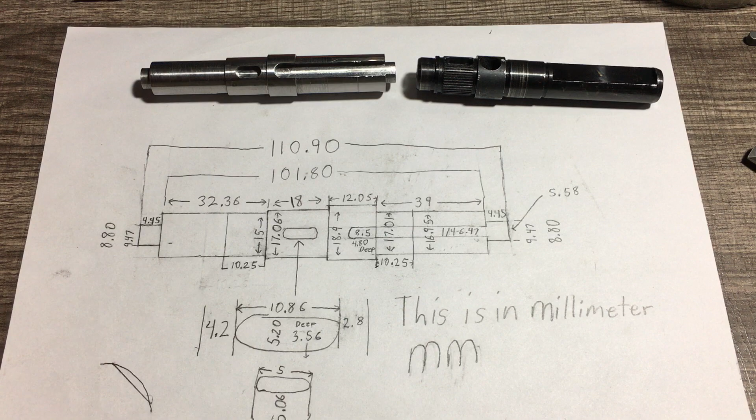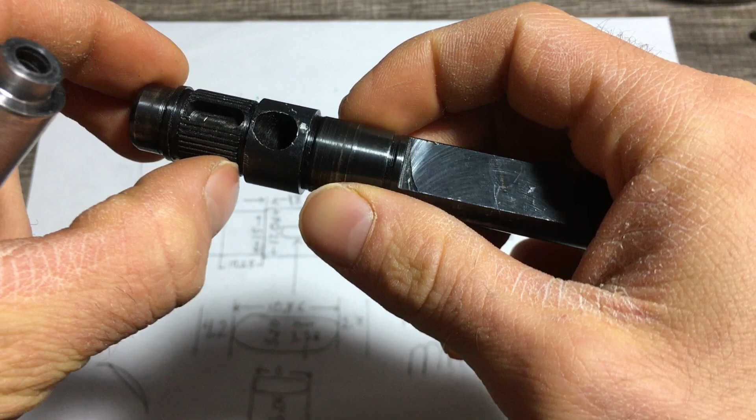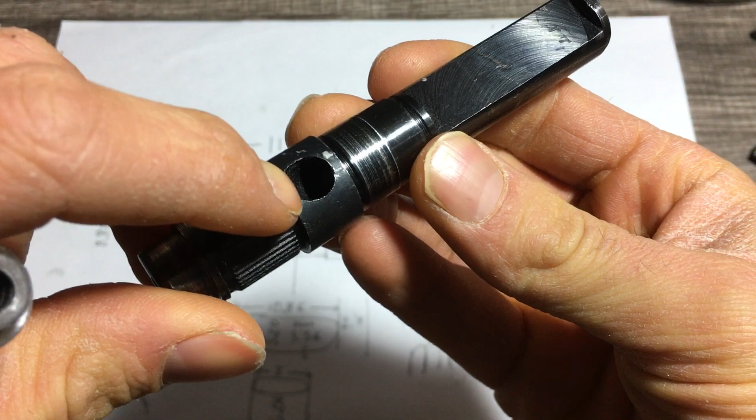So you can see the factory shaft has a few extra features in it that are probably not needed, so you don't probably have to worry about making it look like this exactly. So that's a good thing. You see there's a hole that goes through here, and that's mainly for the wires to make it through to the other side.

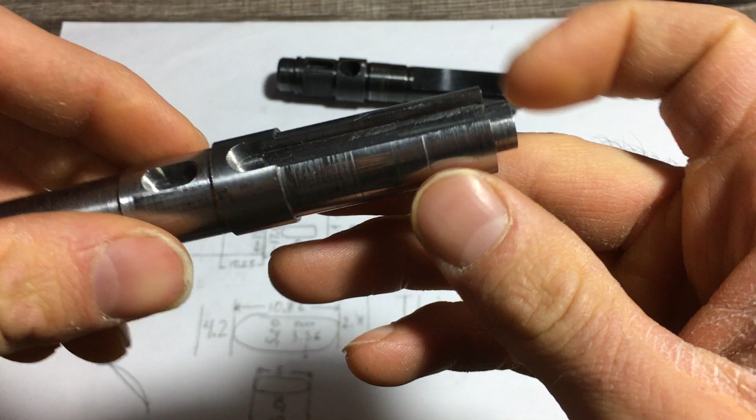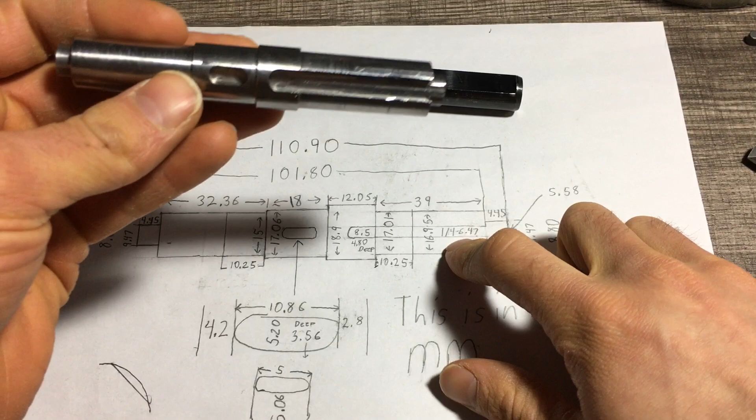On this one, instead of going through the center of the shaft, it goes underneath this keyway, and this keyway allows the wires to get underneath. You see, this was drilled out with a 1/4 end mill. It was milled out pretty much from here all the way on the inside here. You see 8.5 millimeters from here to here. Yeah, pretty much.

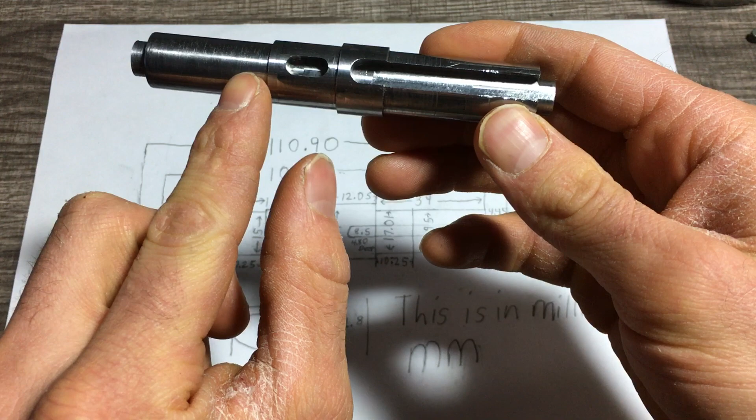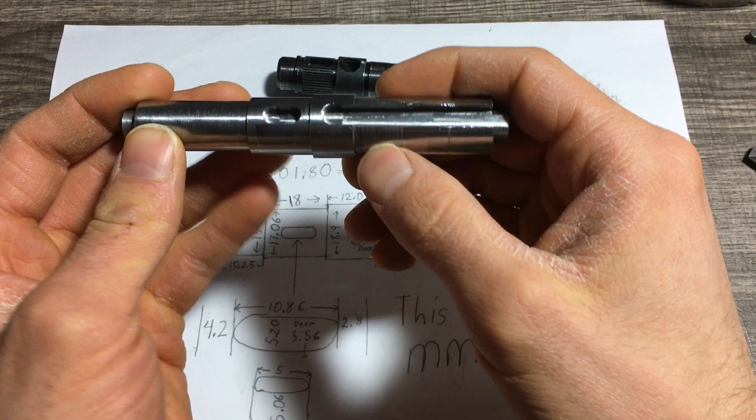The main surfaces you want to be worried about when making this are like the bearings and the stator, and the spacing between them are important. You see here the diameter you want to try to get close to is like 17.01 millimeters. This one's a little bit underneath that size, and I can show you what I mean by it.

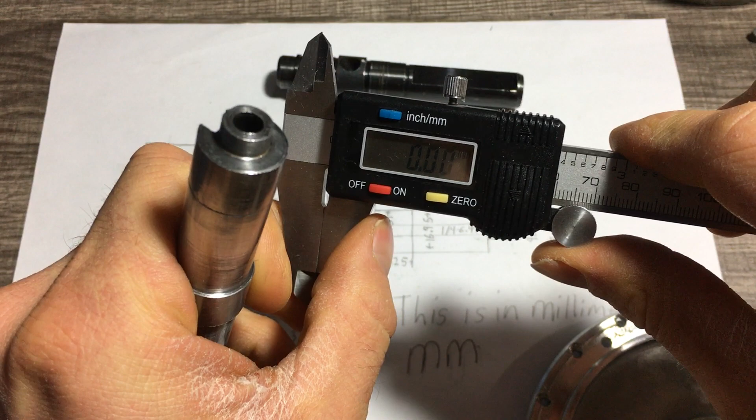I grab the caliper first. Oh, that's not quite correct. What's going on here? Okay. This is saying 17.1, but it really isn't consistently. Yep. Yeah, this shaft should be very close to 17 millimeters.

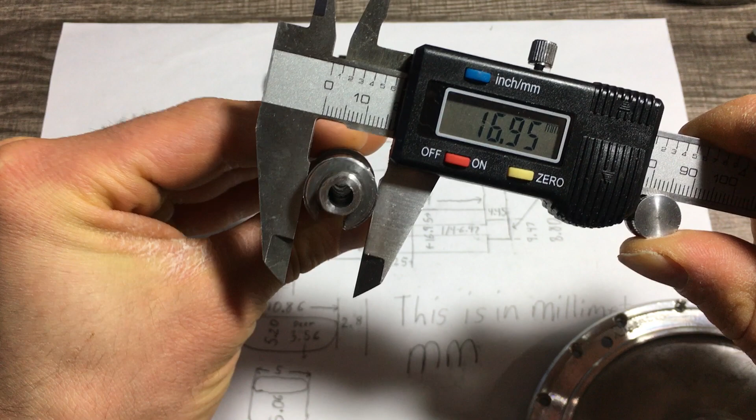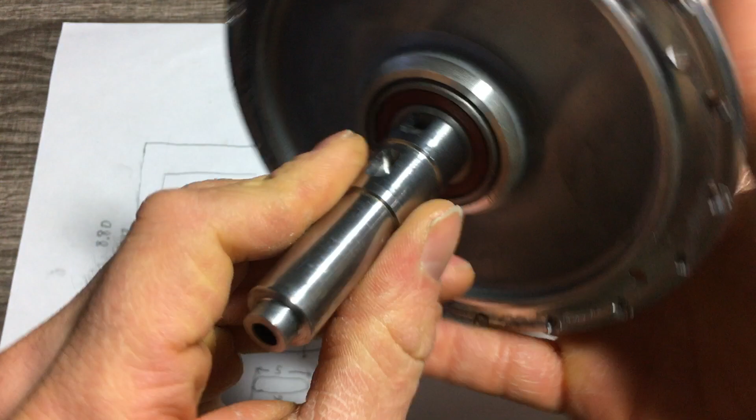And as I go through here, diameter kind of gets a bit smaller. And that helps to allow the bearing to slide onto the shaft. See here is a little bit of wiggle room between the bearing and shaft, and that's pretty much what you want to avoid. Unfortunately, on my spindle, I sanded a little too far. I got a little bit of wiggle room on the shaft. So you definitely want to be a bit larger than the 17 millimeter. Or just try to sand it until it just barely fits.

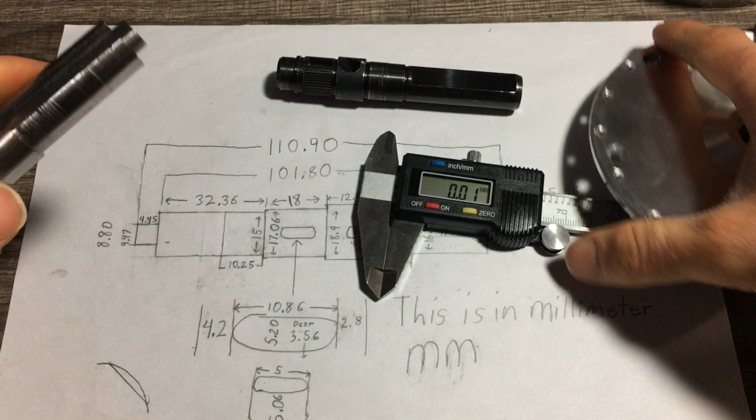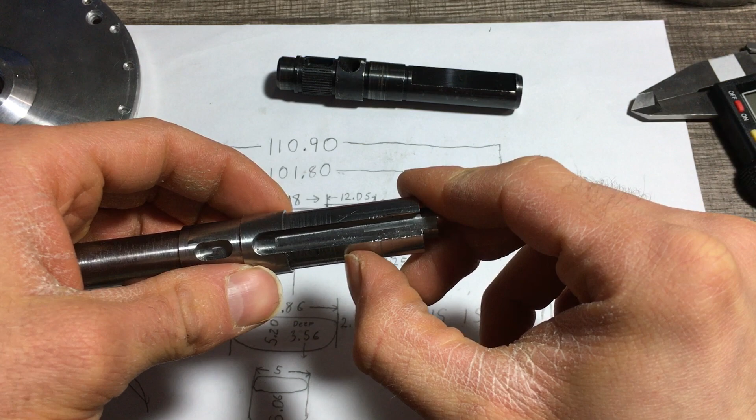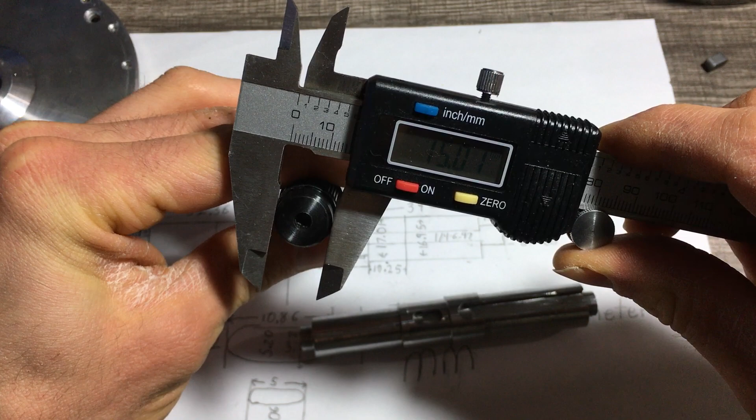See, this spacing here is where usually the bearing would sit on the shaft. And so after the spacing, you can make this shaft diameter a little bit smaller just after it, so that you can get the shaft on and off easy. This side, we have 15 millimeter, pretty much 15 millimeters spot on. And I can show you, it's pretty much spot on 15 millimeter. Zero. But yeah, it should be like 15 millimeter on this one. Pretty much 15 millimeter.

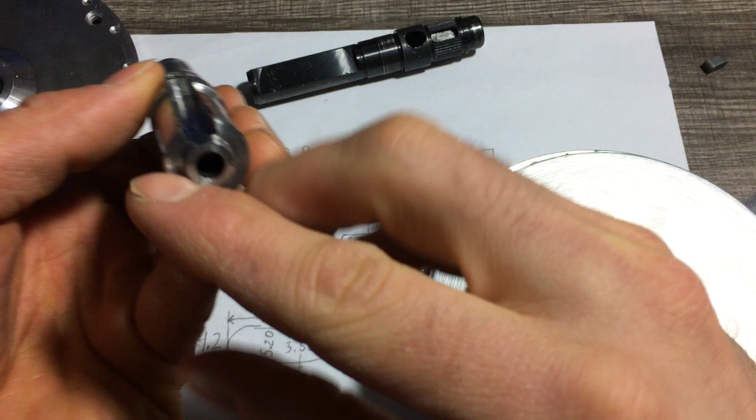Now, the thing I wish I'd done was made this a little bit smaller diameter after the bearing, because as you can see, when trying to get this off, I kind of messed it up with some pliers. That's going to be an eyesore for me to live with forever. And you see here, it fits pretty tight on the bearing. But it will slide on though. But yeah, it's a pain.

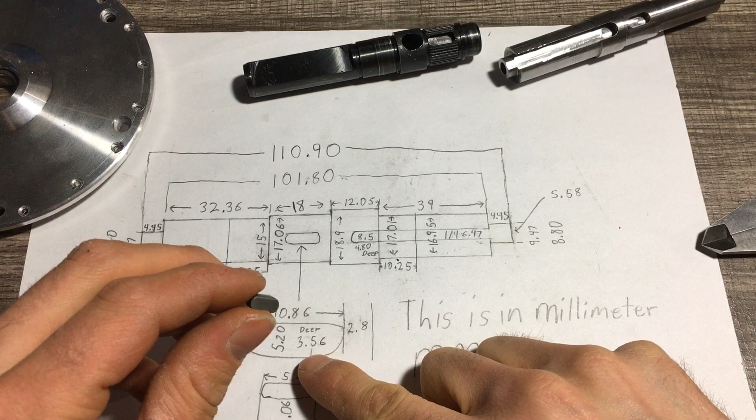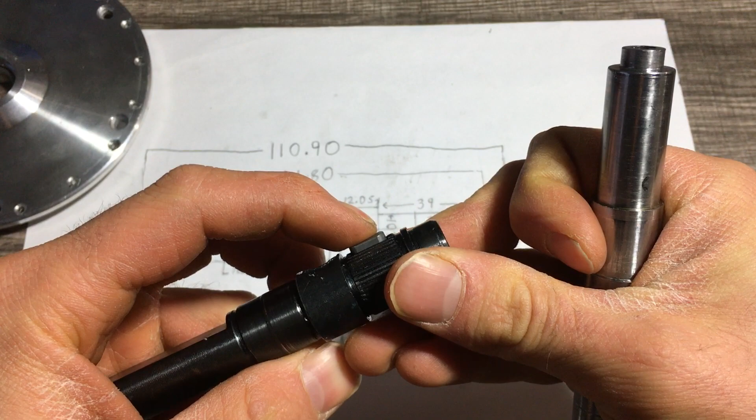Oh yeah, the keyway. Pretty much this keyway, you can see like 3.56 millimeters in its depth that it sits in there, which is a little too deep actually. This one's actually a little deeper than that, but I say it's a little too deep. You can probably bring it up to like half of like 5 millimeters or so, and it'll probably be good. Yep.

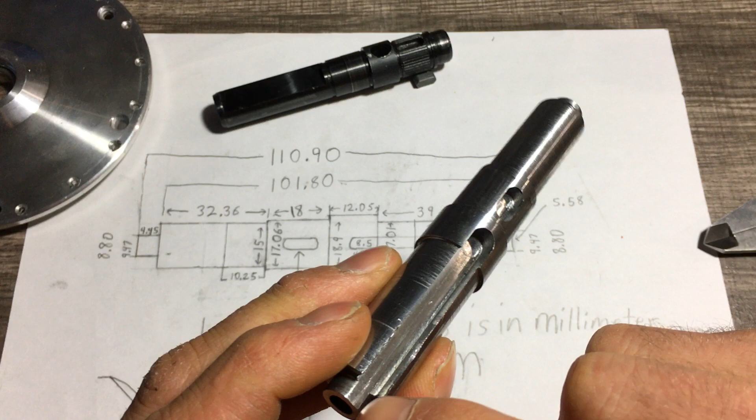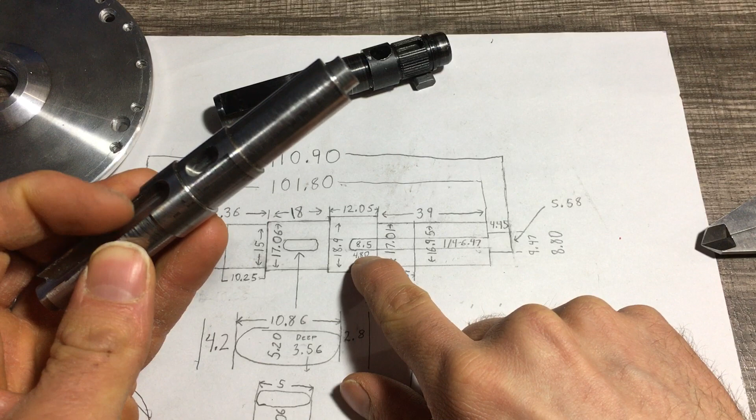So this was cut out with a 1/4 end mill from over here all the way through. You see 1/4, and the distance between each side is like 6.47 millimeters. As you can see, the depth from this here to the bottom of this is like 4.8 millimeters, and from here to there, that's like 8.5 millimeters. So it allows you to get the wire underneath the bearing.

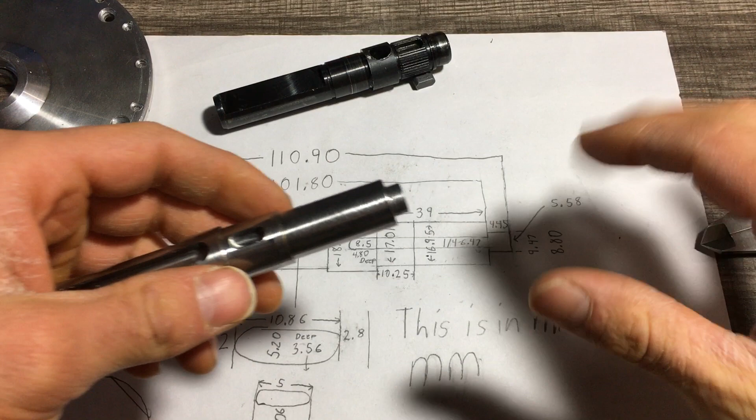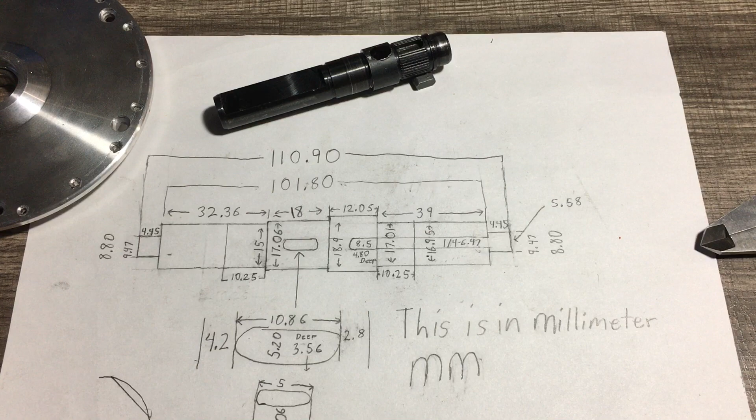Now the next thing I probably should talk to you about is the different sizes between a road bike shaft and usually some of the mountain bike shafts for the quick release ones. And you see, I went pretty much for the mountain bike size. It's a little larger, but the road bike one is a little smaller. I can probably show you what I mean by it.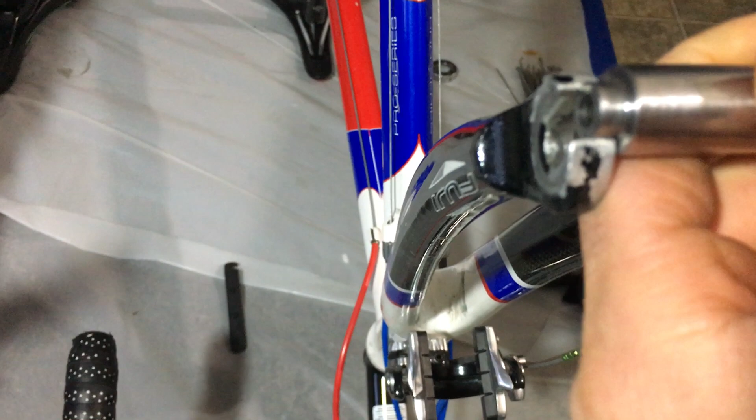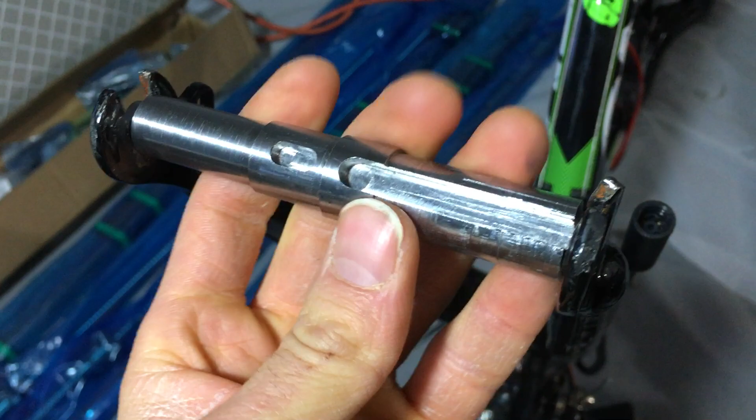Come look over here. Set them on there. That one's a little smaller in diameter, but over here you can see it's not gonna fit. Over on the ones that would be for mountain bikes, it fits perfectly fine. And that's pretty much what you have to be worried about on that.

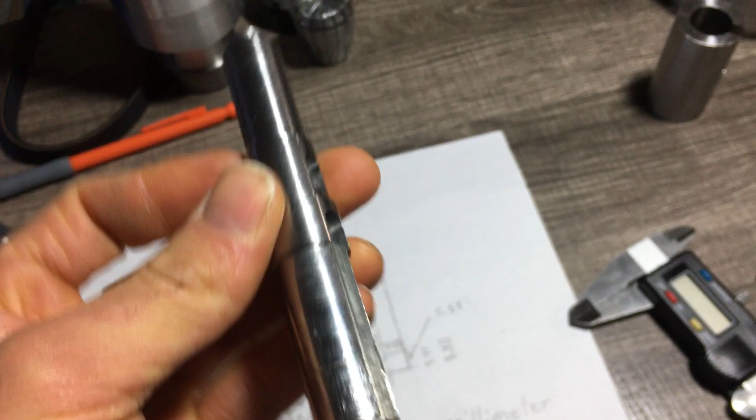Now this hole, the way I drilled the hole in this, you can see, you look all the way down in there, it's not perfectly aligned with the other hole on the other side, halfway through. That's because I had to drill to the center of this on either side because my lathe isn't big enough. But yeah, stuff you have to live with.

Oh, I gotta get the camera back on.

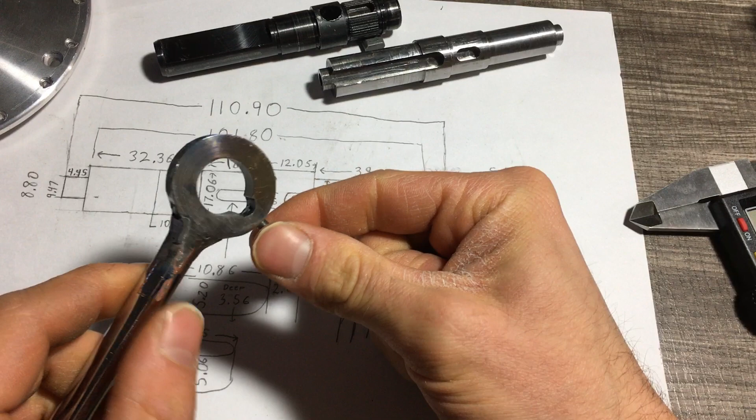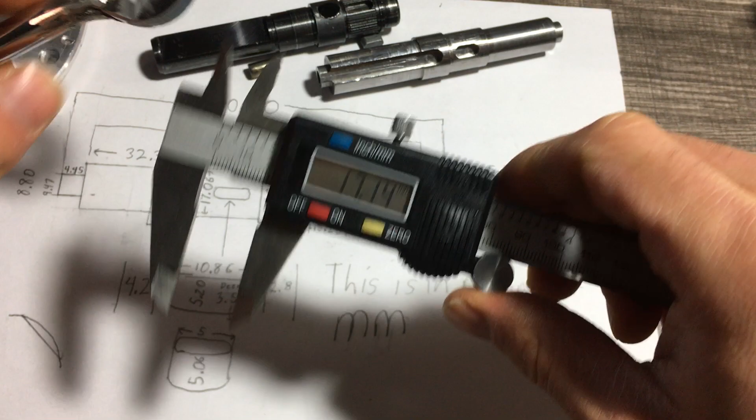Now this is the arm for it. You can see, it should be just a little bit larger than where it would go for the diameter of the shaft. 17.28 or so. Thickness 8.8 or so. Over here, it's like 31 millimeter.

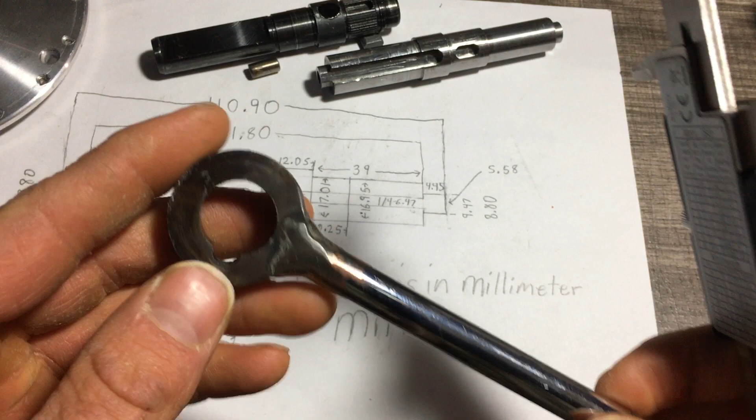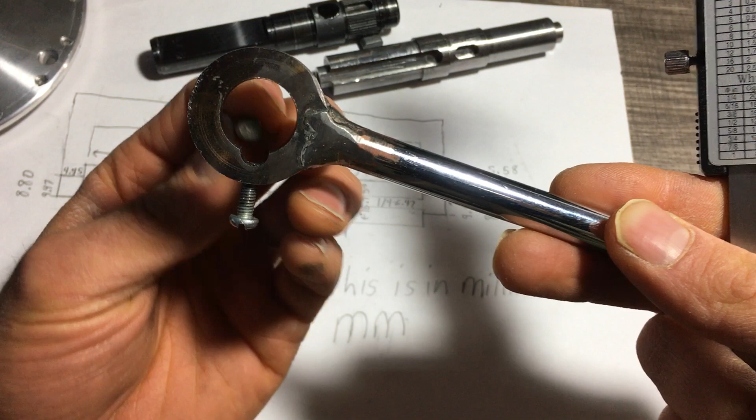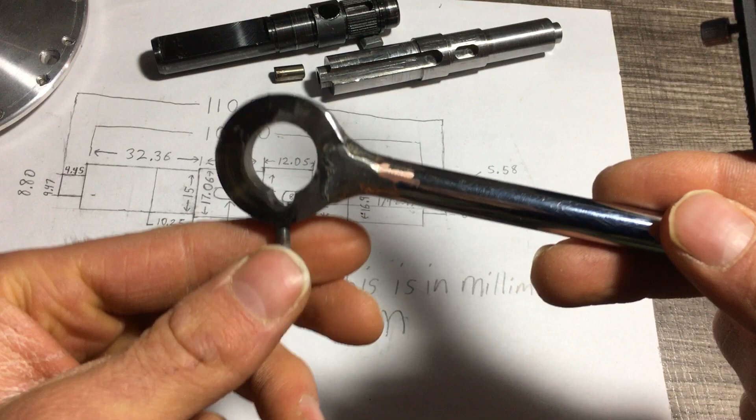And you can see we have a round instead of a square one. That's for a round drill bit piece for 1/4 size. The reason why is because I didn't quite have a keyway cutter, so I just used the 1/4 end mill to cut that out, which is fine. It's not gonna end the world, of course. You have this set screw to help hold it in place. And I welded this piece of metal to it.

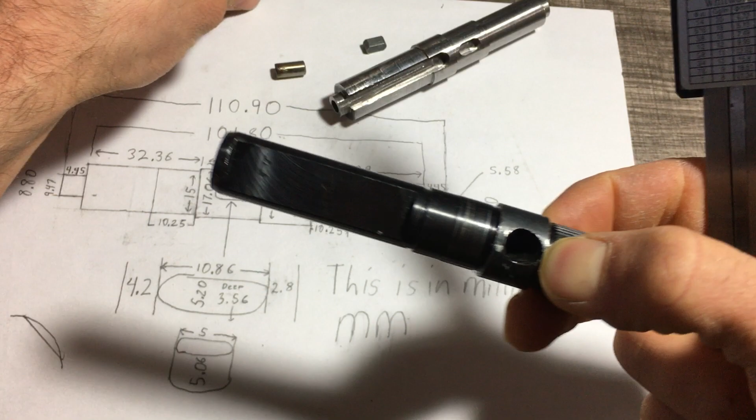And the spacer that's pretty much used to get the shaft off, pretty much has a 1/4 cut hole here. This was done with the 1/4 end mill. The inside diameter of this is to fit around the outside diameter of this, because this one's like 19 millimeter on the outside. I'll show you.

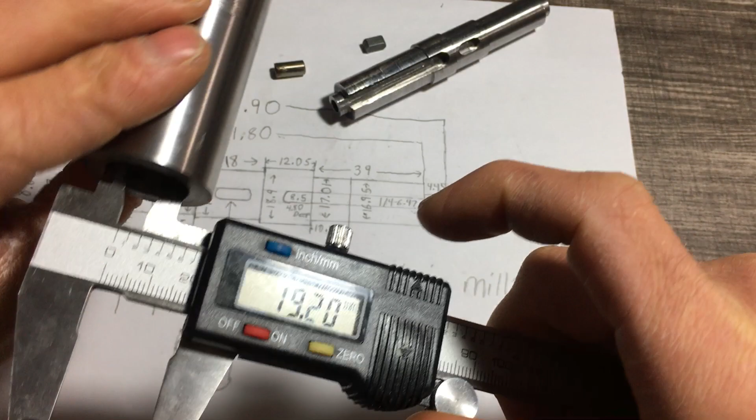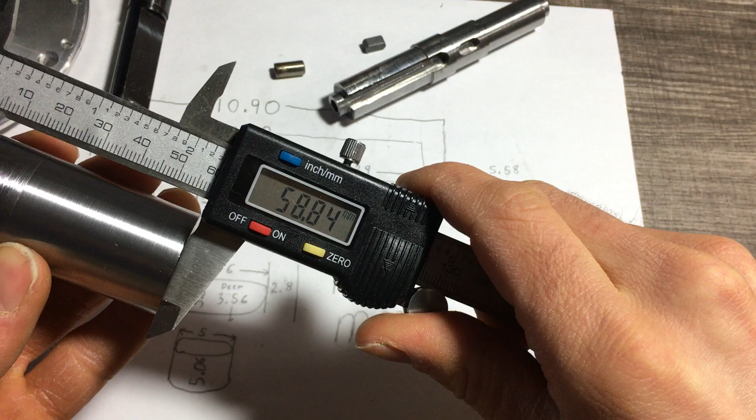I got 19.20, something like that. Side diameter. Yep, like so. Between here, somewhere around in there. The length, something like that. The overall length of the spacer isn't quite as important. It's not really that important, just long enough for whatever setup you have.

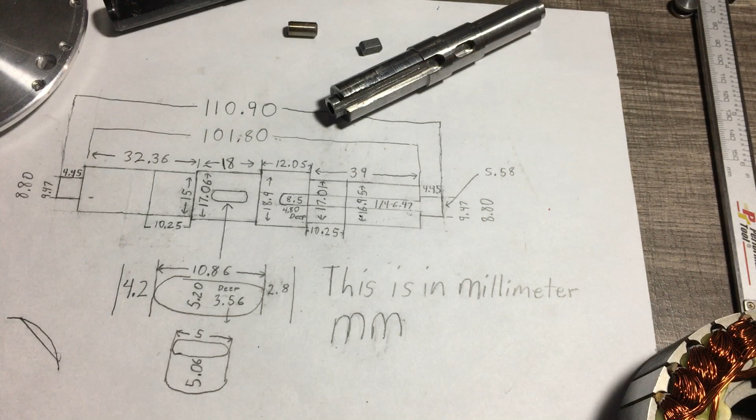So here, what else can we talk about? Now the stator itself. Compare it to a fresh one. This one is a little discolored because it went through a little too much heat, so they get pretty hot. So you definitely want to try cutting holes into your hoverboard motor to try to keep it cool, depending on where you're going to be using it. If you're using it in a lot of dirt, you probably want to avoid that and just run it at a lower power rating, and you should be fine.

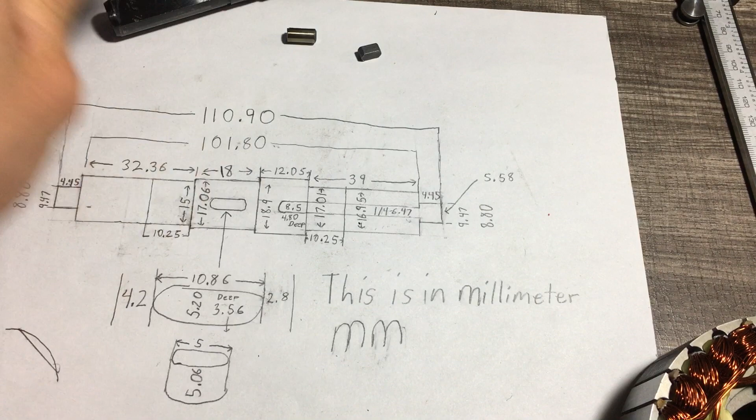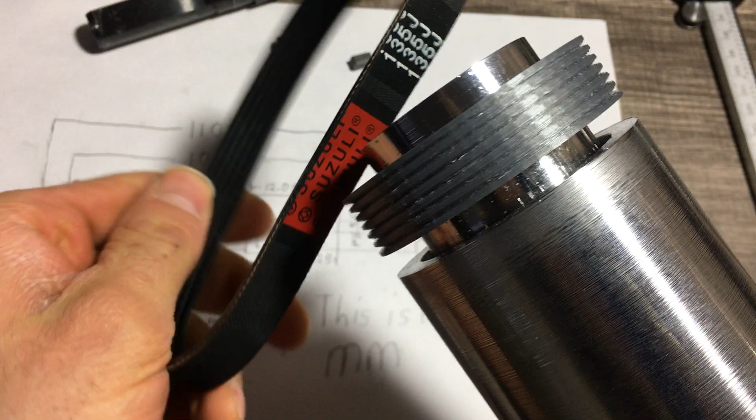See here. Update for the milling spindle. It's kind of looking beautiful. Angular contact bearings inside there. Pretty much got a poly V belt here. This is like a J6 or something like that, 13.5 inch. It kind of goes on there. And then I'm gonna have one of those sewing machine servo motors that's going to drive this.

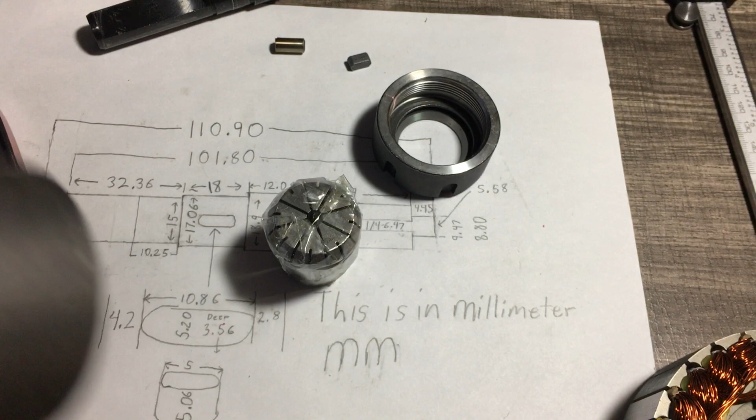This will eventually be mounted in the tail end of the lathe, and I'll cut threads into this and cut the taper for the ER32 collets and the nut for the ER32 collets. But yeah, it's looking pretty so far. That's an update on that.

You probably see that I have the HGR20 linear guide rails. I got the longer one here, this one's like 1700 millimeters. This one's 1000. And hopefully that will make a pretty good milling machine. But yeah, I guess that's it so far.

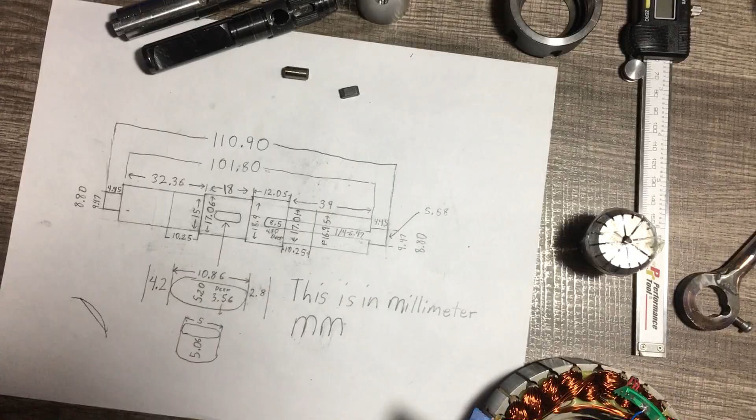Can't think of anything else I can tell you about. What else? But yeah. That's pretty much everything. I guess I'll upload this video now.